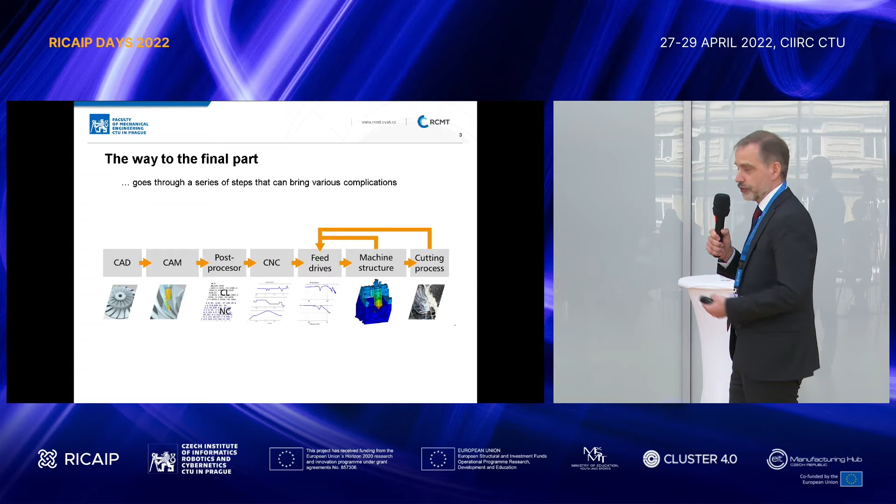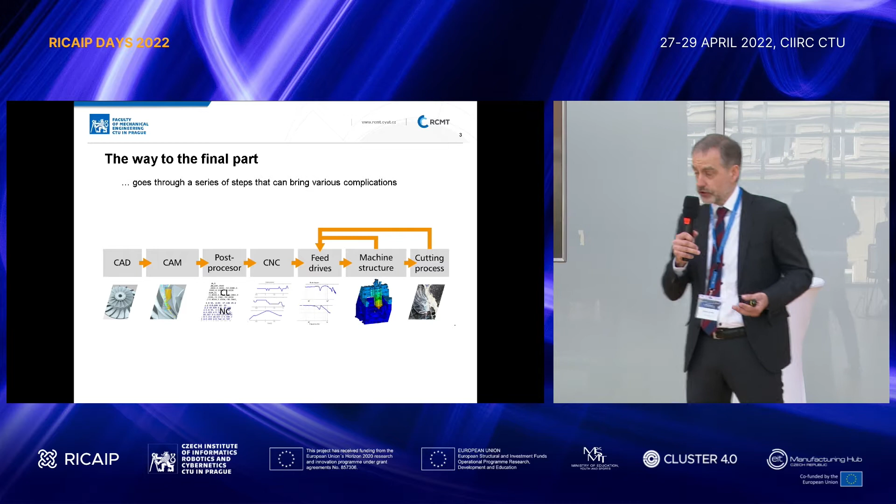Actually, why do we need to cope with digital twins for machining prediction is quite clear from the complexity of machining operations, which start from the NC code generation, and the whole chain goes through different stages of CNC control, feed drive control, machine tool structure, and the process itself, which generates at the end of the whole chain the final product, which can fulfill the requirements on accuracy, productivity, quality of surfaces or not. And this is the issue since there might happen many troubles which need to be addressed and solved.

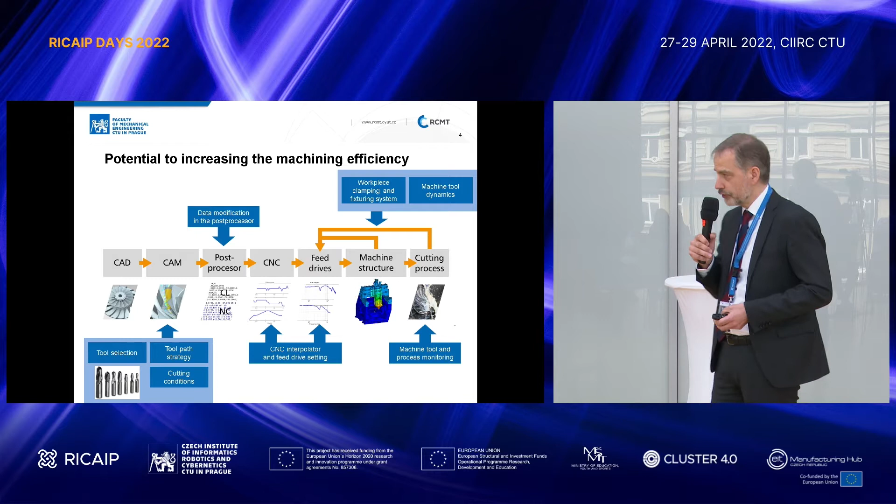Actually, what can we do for having the process stable and robust? Of course, at the first stage, we need to set the cutting tools, cutting strategy, cutting parameters. We need to adjust post-processor. We need to adjust parameters in the machine tool control, CNC control, feed drives. We need to adjust setting of the workpiece in the machine tool working space, taking into consideration the dynamics of machine tool and workpiece in some specific cases. And last but not least is then the issue of machine and workpiece interaction.

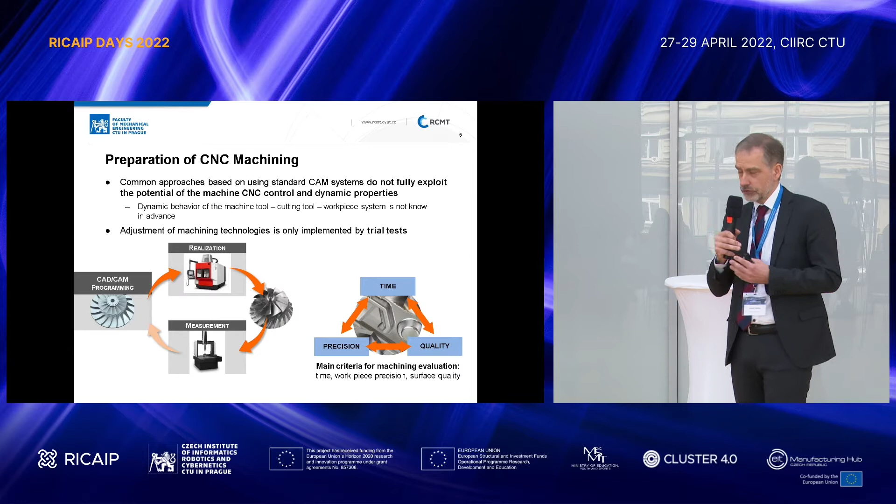The processes, as they are commonly prepared nowadays, lack the information on what is the dynamics of the machine tool behavior, and this brings many troubles in terms of not knowing exactly what will be the result of a machining operation. This needs to run on many iterative steps before the final product, fulfilling all the criteria, is achieved through the measurement, adjustment of NC code and machine tool setting.

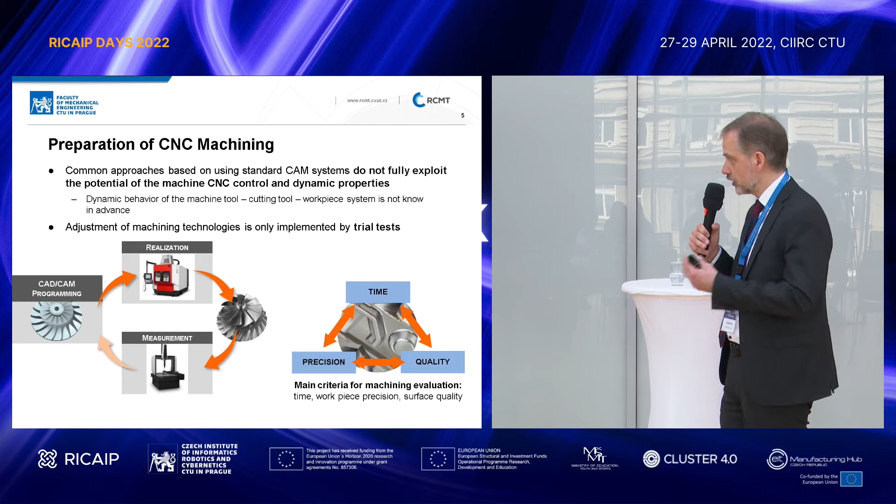We can use digital twins. We can have different types of digital twins. I will talk later about the digital twin, which we call process digital twin, and its application for predictive purpose of predicting the machining operation and its optimization. Generally, there are digital twins for many applications which serve for testing the PLC and CNC setting of the machine, which just use the kinematical model of machine tool structure. Those are the models which we call models for virtual commissioning.

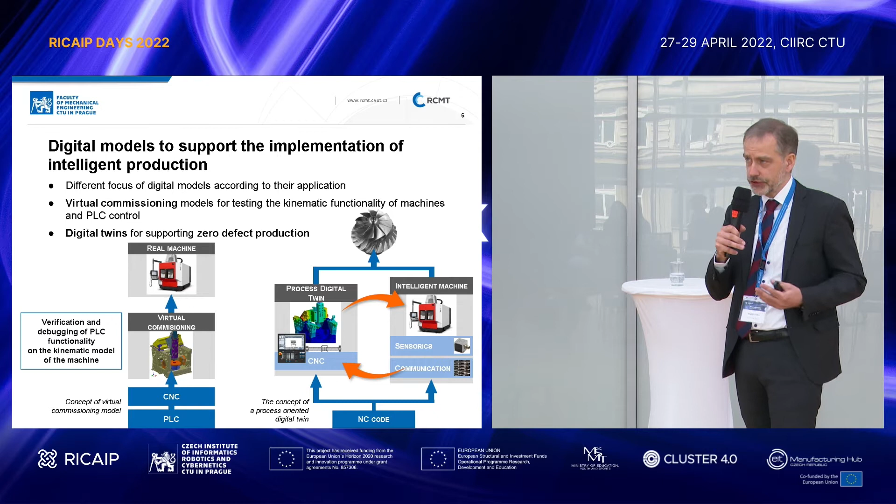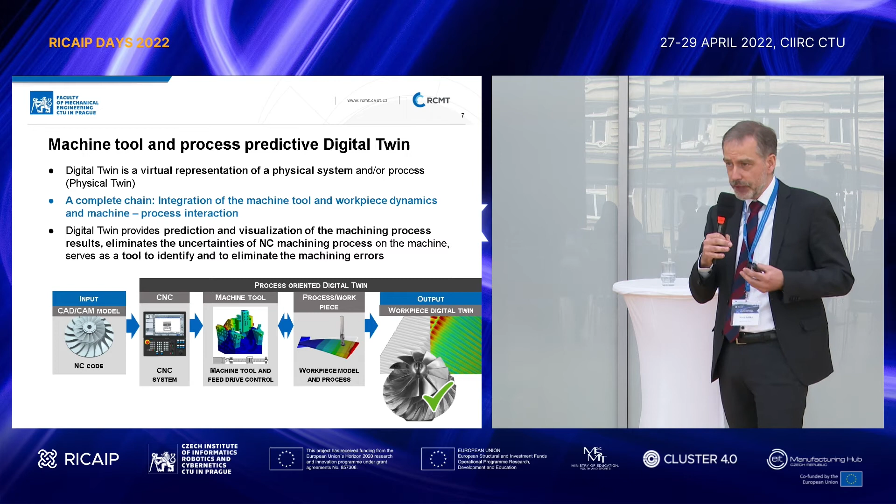The other side of the slide shows the concept of digital twin and its integration with the data from the processes, as will be handled later by the next speaker. We have the digital twin, which is a realistic representation of the physical system of a machine tool, its structure, dynamic behavior, control. And this allows then the realistic simulation of machine, process, and workpiece interaction. By having that chain, we are capable of a detailed simulation and visualization of machining results.

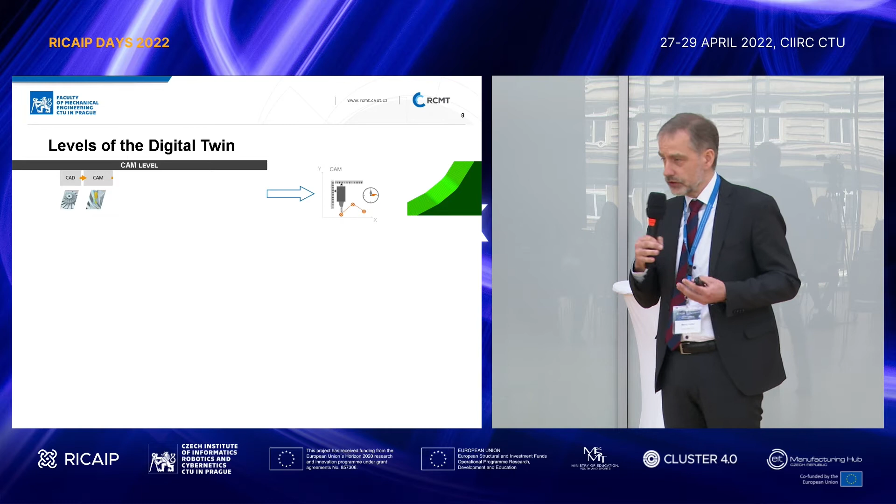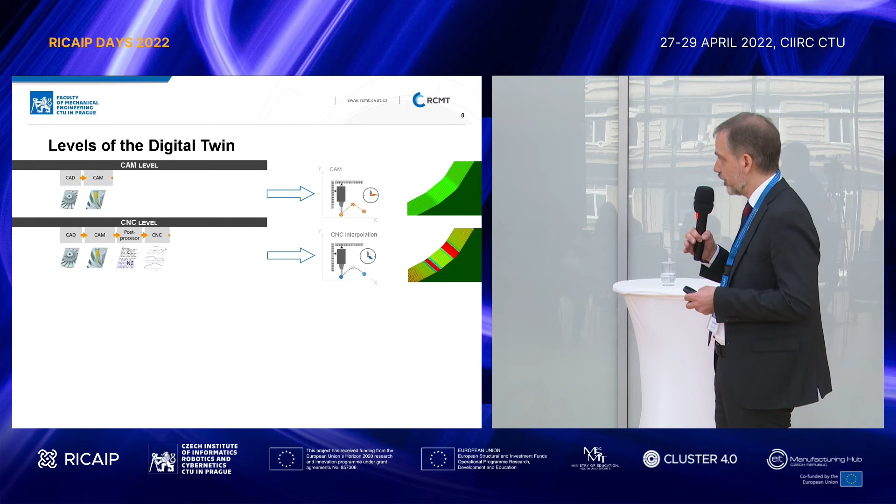There might be different levels of digital twin according to the application. The basic one, which just takes into account the NC data, we may call it as CAM level, which serves as a very preliminary check of machining operations. The next level is the CNC level, which integrates already the CNC controller, which brings quite many problems and possible errors which we may see on the final product. The next step is also the integration of machine tool dynamics, which further gains or eliminates the errors introduced by the CNC controller.

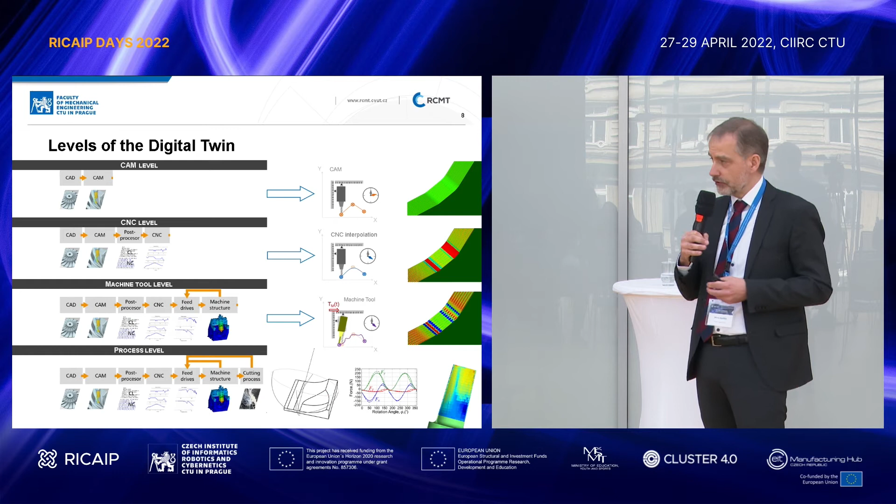And the highest level is the process level of digital twin, which integrates all the physics of the process, including cutting forces, deflection, static deflection of cutting tool, workpiece, issues of chatter, stability of the process, vibration, and this relates especially to the most complex machining of lightweight or thin-walled workpieces.

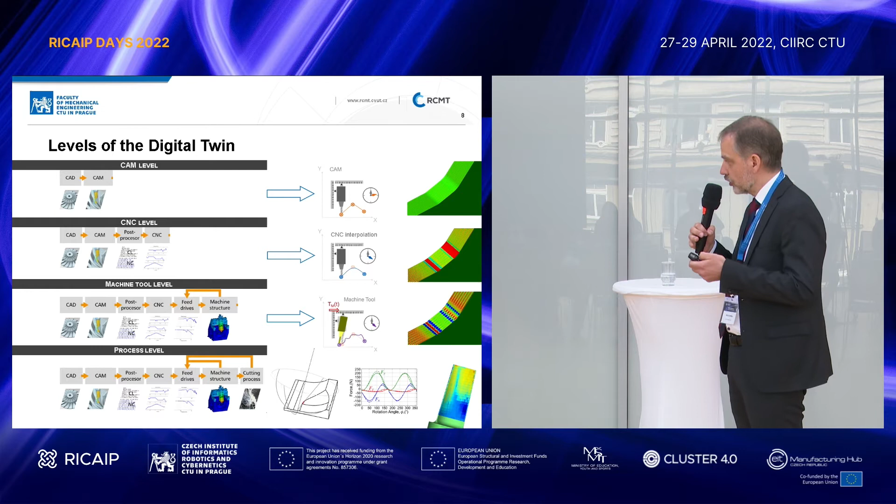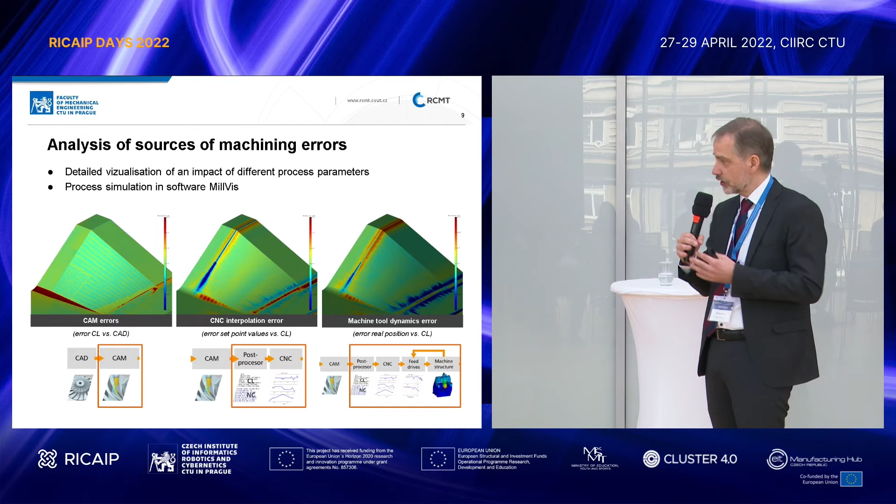That structure of digital twin allows a detailed insight into possible sources of errors in machining operations, and thus allows understanding better what's happening in the process where we need to search for sources of errors. Here on the picture we can see a visualization of different errors coming from either the CNC interpolator or the full machine digital twin.

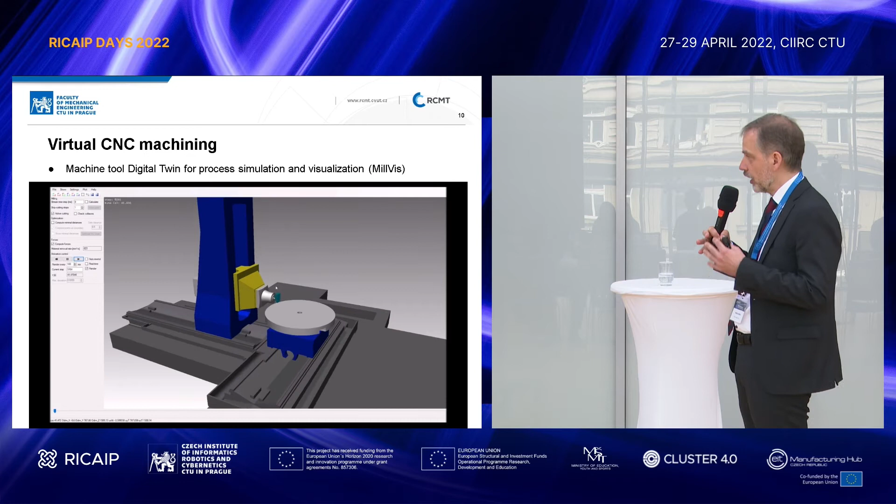Everything can be integrated in machine tool and process simulation, which delivers all possible data, allowing better understanding of the process and better understanding of where the errors are coming from and where we should optimize the process.

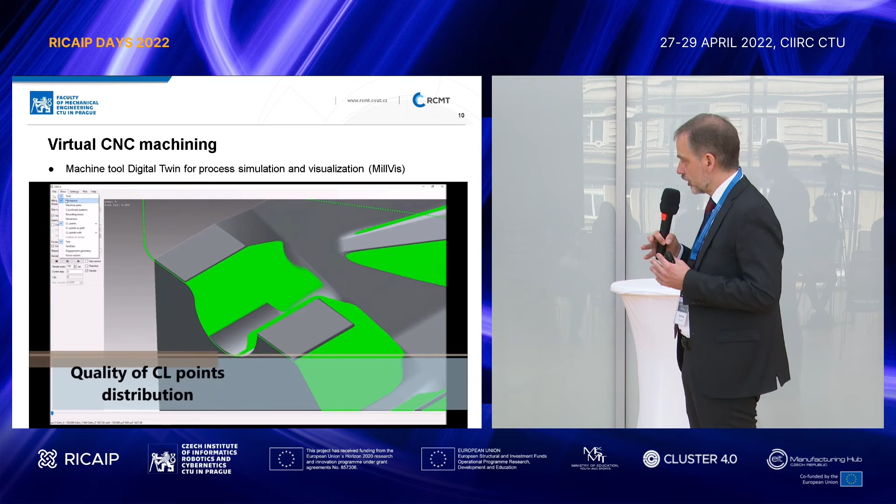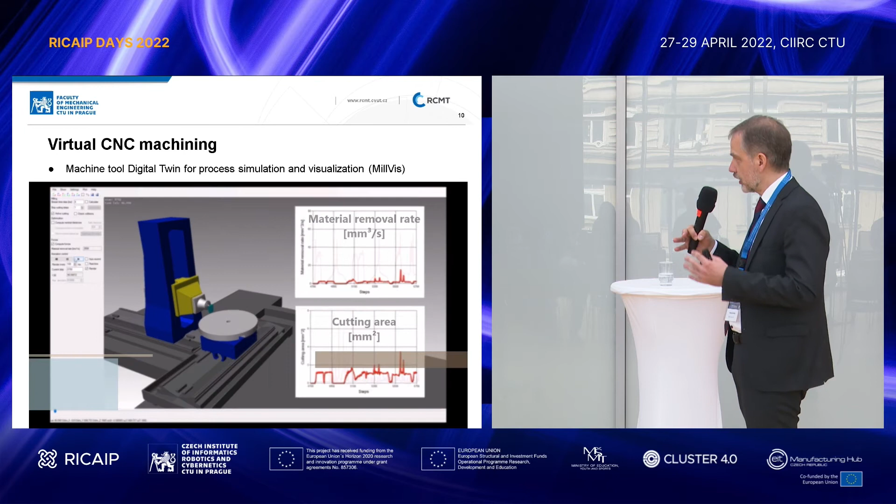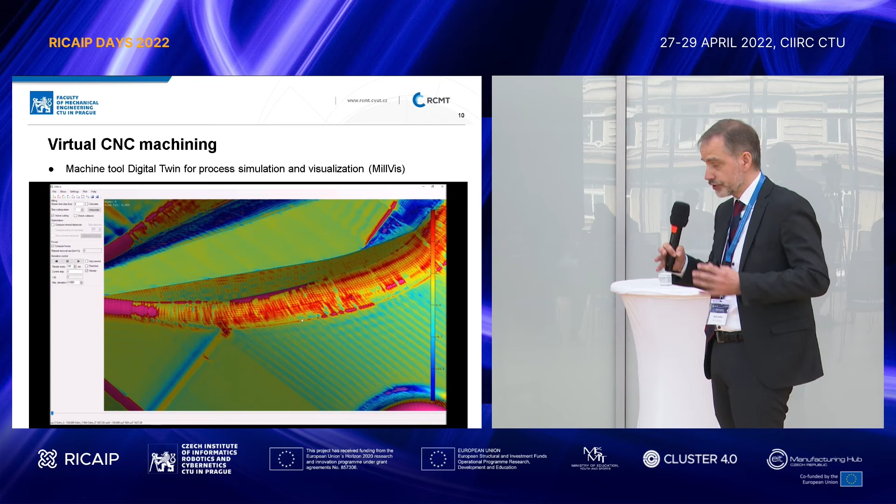Here we can see various parameters and variables which are helping us in understanding the processes, starting from the NC code quality and distribution of CL points, tool engagement, cutting forces, tool load, spindle torque, and finally we can check what all this, with the integration of CNC control, feed drive control and machine tool structure, brings on the final result of machining operation, checking the accuracy and quality of machined surfaces.

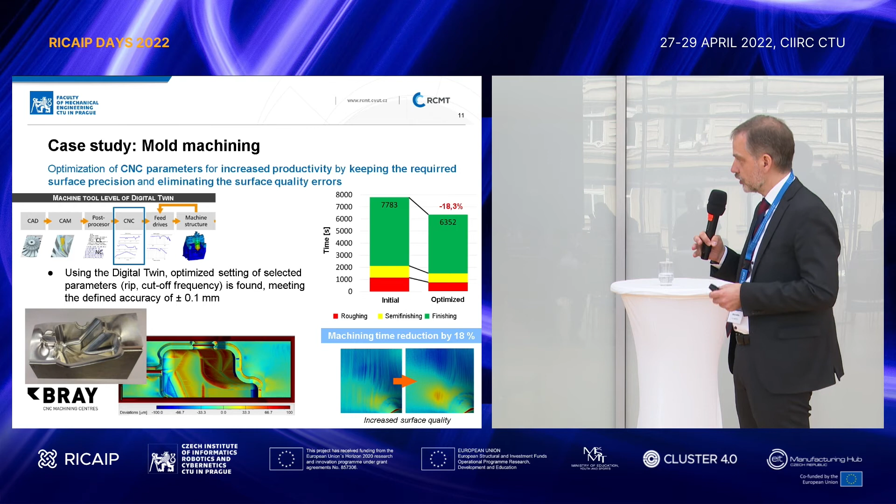Here, that real example from practice showed that by the digital twin we identified possible boundaries in increasing the productivity of the process by optimized setting of the CNC controller, which brought increased productivity by almost 20%, and at the same time increased surface quality, where the optimized setting of parameters eliminated the errors on the surface.

A higher level of the digital twin application and optimization of the process are the processes where we machine thin-walled flexible workpieces, where we struggle mainly for chatter-free cutting conditions, low deflection of the workpiece, and last but not least, also the complexity of 5-axis machining.

Here the example shows machining of a steam turbine blade and its optimization, where the first result of machining, as it had been prepared by the conventional approach, brought many errors on the surface, mainly quality issues. And by using the digital twin, we could test many different strategies without any need of running physical tests on the machine, thus saving time and costs.

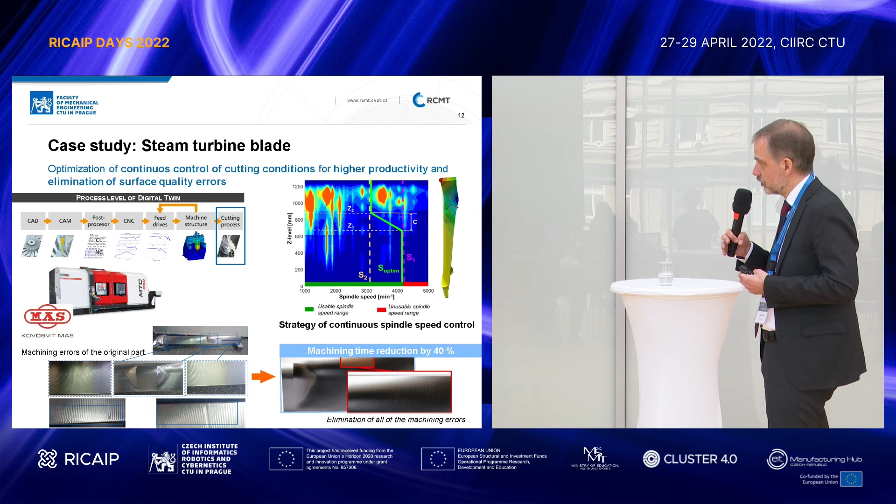This showed here a very effective application of spindle speed control and finding the cutting conditions which avoided the elevated vibration of the blade, and at the same time, again, you can see a significant reduction of machining time.

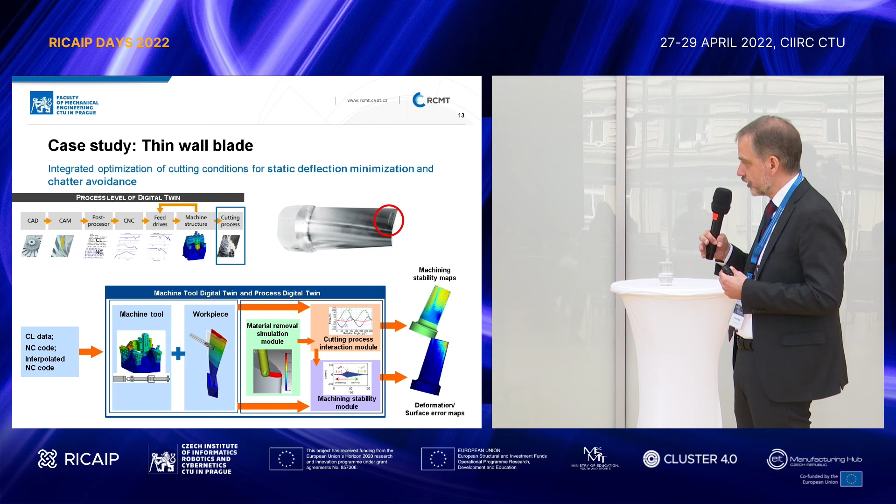This brings the challenge to integrate both the static and dynamic behavior of the workpiece into the machining simulation, into the digital twin, which can allow integrated optimization for both minimizing the static deflection and increasing the dynamics of the process and elimination of vibration issues during machining.

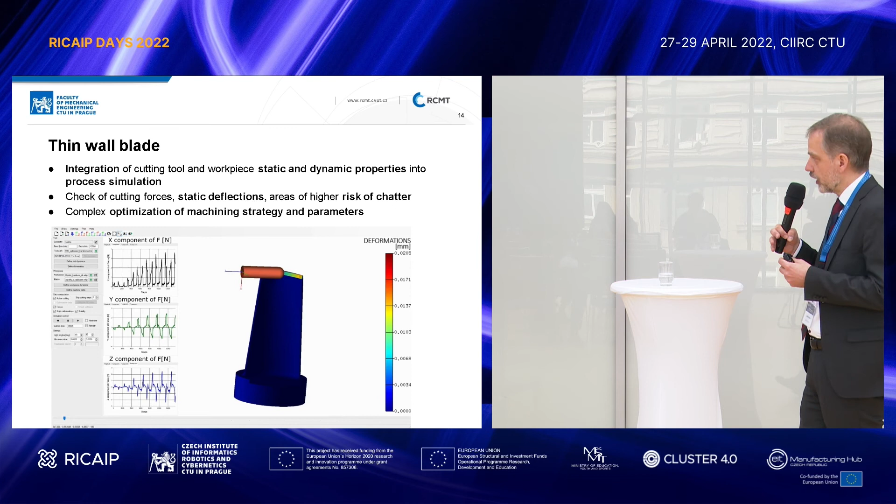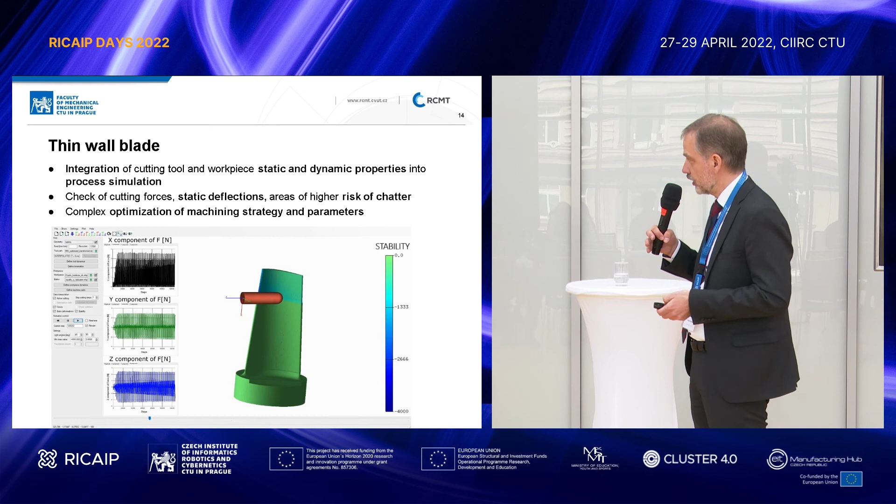In the simulation software which we are developing at RCMT, we can run the simulation integrating the dynamic behavior of the flexible workpiece depending on the material removal, and predict both the static deflection of the workpiece and stability limits of processes, which in the example I'm showing here brought again a positive result in eliminated quality issues on the surface by setting a different machining strategy and cutting conditions.

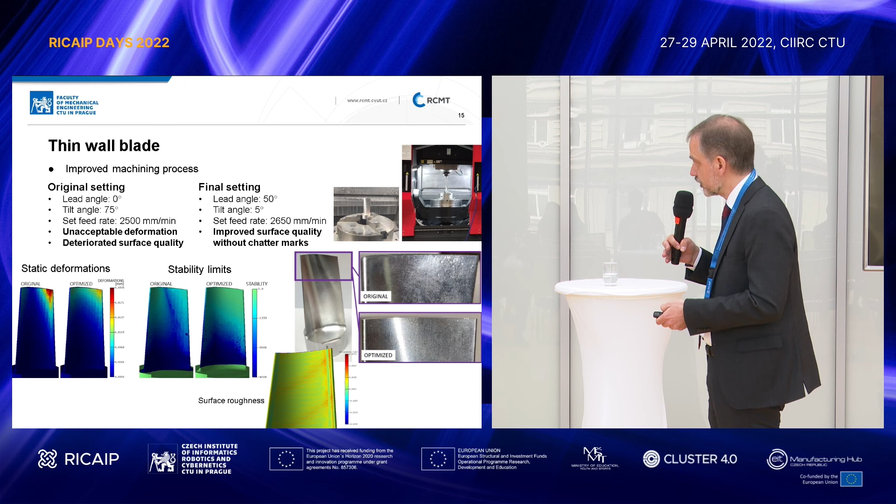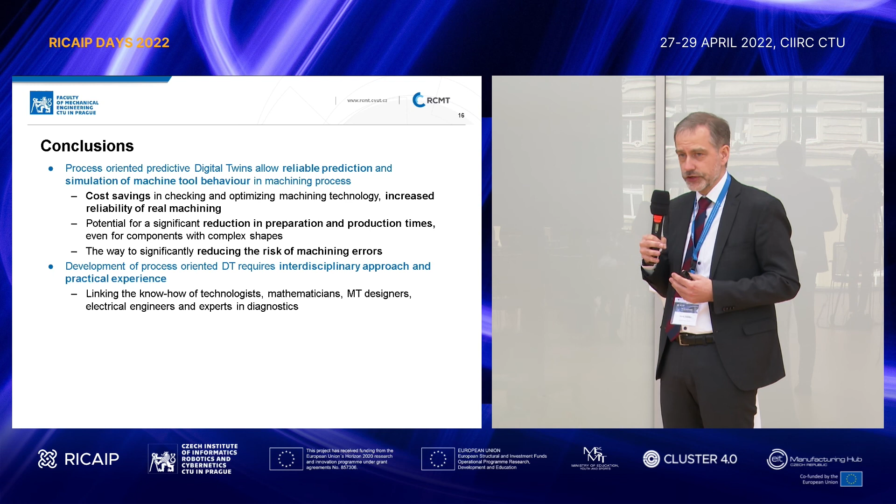So this brings me to the end of this short overview of the applications of the digital twin technique for predictive purposes, where, as I can summarize from quite a number of practical applications, we may confirm that the digital twin is capable of running relevant simulations, delivering relevant results, and then offering the opportunity for optimizing the processes with respect to the parameters which are set as the requirements on the workpiece.